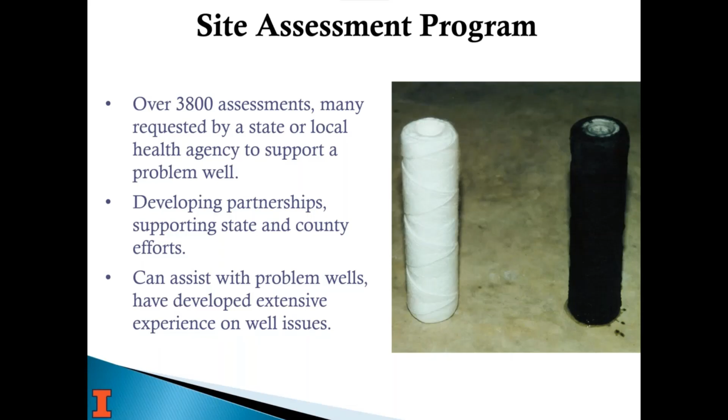So I'm at the State Water Survey. Actually, all three of us are. And just a little bit about us. We're not real well known, just from the standpoint that every state has a state geological survey, and most folks are familiar with that. Illinois also formed a state water survey back in 1895, really because of cholera and typhoid outbreaks and its relationship to water and safe water.

And since then, we've grown into an agency that houses the state's well logs. We have a lab. We do a lot of work. When a well owner calls us in Illinois, we can provide them a lot of information from our files. We have records dating back to the 1800s on wells in Illinois. And we also help communities with water quality problems and do applied research related to drinking water and well water and groundwater issues.

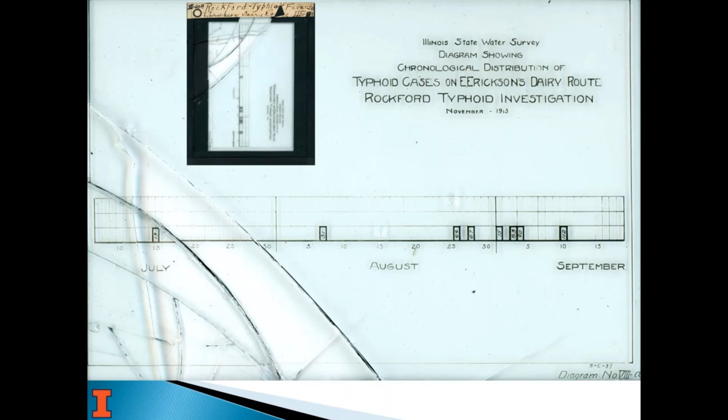Everyone gets their milk from one shop, if you will, and that is usually a large tank where everybody's getting their milk out of a bucket, pouring it into their containers and taking it home. And so this was an investigation to see if the milk company might have been contributing to this. It's just pretty interesting stuff when you have a chance to go back and take a look at it.

So as a private well owner, here are the things that we really want to make sure people are clear about. Private wells aren't regulated. The Safe Drinking Water Act regulates community and public water supplies. Private wells are not. So you're on your own to make sure your water is safe to drink and your system's maintained so that you always have water pressure. Your water's safe to drink, all those things.

And well water many times can be the best tasting, safest water in the world. But sometimes it can include things that are odorless, colorless, and have no taste. And a good example is arsenic. It's naturally occurring in some groundwater, not everywhere for sure. But we have one aquifer here where there's several counties where there's a fair amount of arsenic. You would never know it from drinking it. So you need to test. That's the bottom line, to be sure.

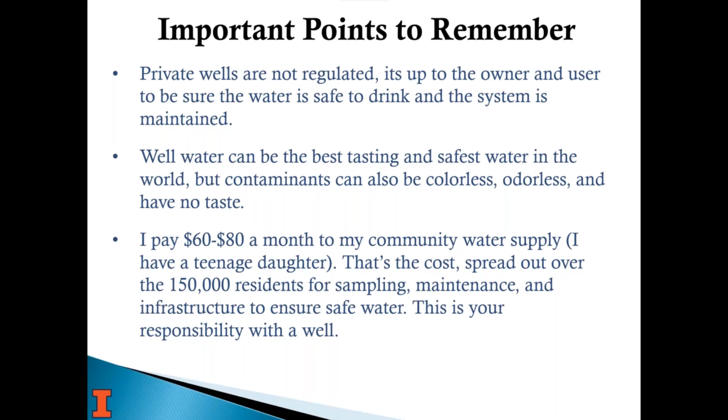You need to maintain your system. You need to make sure you're putting a little money away so that whenever you do have a pump fail, it's a mechanical device, eventually it will, or there's some other issue, you test and discover you have a contaminant and you need to add treatment, that you've got a way to do that. And you just need to be responsible and a good steward, both to protect your family and also the aquifer in some cases.

So what we really hope to get out of our 10 lesson class and these webinars is really what we want everyone to learn, that you need to understand where your water's coming from. So you need to have a well log if it's available and understand what's on it. And we're going to go over that today. How deep it is, whether it's got a screen or not, whether the pump's down in the well or at the surface, all those things.

You can find out from your state or local agencies a lot of times if there are any naturally occurring contaminants. If someone calls us, I can tell them where we know there's arsenic in the aquifers and where there isn't. There's other areas of the state where there's different constituents. We have an area where there's salt water upwelling into the freshwater aquifers from 1,000 feet below land surface. So knowing those things and knowing who to contact, it's important for you to be a little inquisitive, be a good investigator, and find out if there's anything like that that could be a concern.

Some things like iron are pretty ubiquitous in groundwater, and it causes those red stains. It's not a health risk per se, but understanding those things may help you understand what you need to do if you want to avoid red stains on your clothes when it's really high. It'll also help you learn which questions to ask. When you have some knowledge about your well and that light bulb goes off, you'll be much better equipped to talk to a contractor or a plumber or your health department or your geological survey, whoever it may be, about issues related to your well.

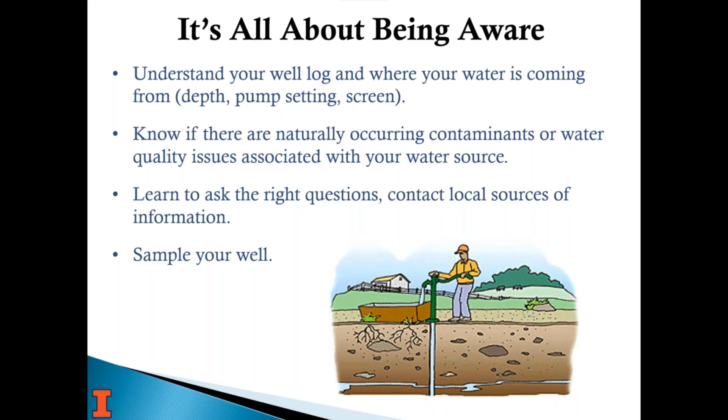And then lastly, sample your well. It's estimated that 2/3 of well owners have never sampled their well water, their drinking water. But it's necessary, and it's something that is simple to do. It does cost a little money, but it's important and it's part of the protection for your family's health.

And so if I have an aquifer that's all sand and gravel, uniform size, and 100 feet thick, if it's full of water, I could take all the sand away and I'd still have 30 feet of water over that entire area. So these systems, especially sand and gravel areas, tend to be highly productive. You see along river bottoms all over the country big sandy areas where they're growing vegetables and melons. Those folks can pump up to 2,000 gallons a minute from some of their wells for irrigation, because the aquifer can sustain that kind of pumpage since there's so much water available.

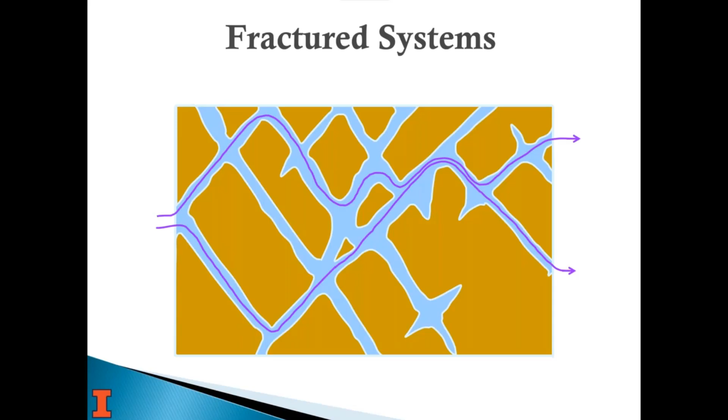It doesn't have very many fractures. I know there's a person that lives on the western slope of the Rockies that contacted us. His well only pumps a half gallon a minute. That's all it'll sustain, and it's just because that's what's available. It just depends on where you're at, what water might be available, and what kind of geology you have under your land.

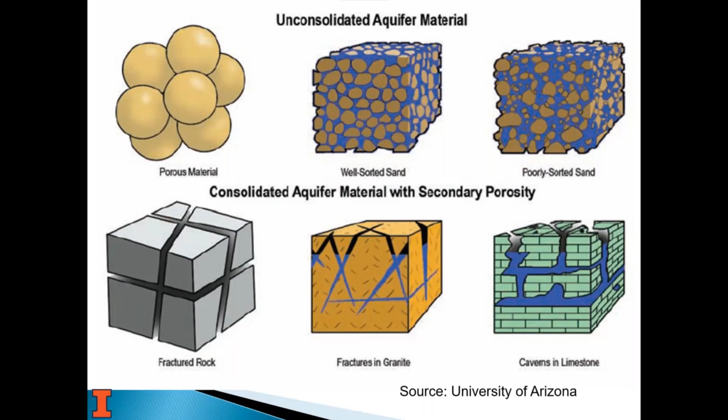We have a lot of karst or caverns in limestone areas in southern Illinois, Indiana, Kentucky, Tennessee. Those are good because those large caves were formed from water running through them, so they store a lot of water, but they also cause sinkholes at the surface. So things from the surface can get directly into the aquifer and contaminate it. It's kind of a double-edged sword in that respect.

Water flows based on pressure. If I pour water on a table and lift one end up, water is going to flow down that table because it's going to lower pressure. Or the opposite way to look at it: if I have a juice box with a straw in it and I squeeze it, I increase the pressure inside, so water comes out the straw. That's very similar to the pressure in an aquifer. When you put a well in, that's the straw. The water level may come up above the top of the aquifer because there's pressure on the system causing that.

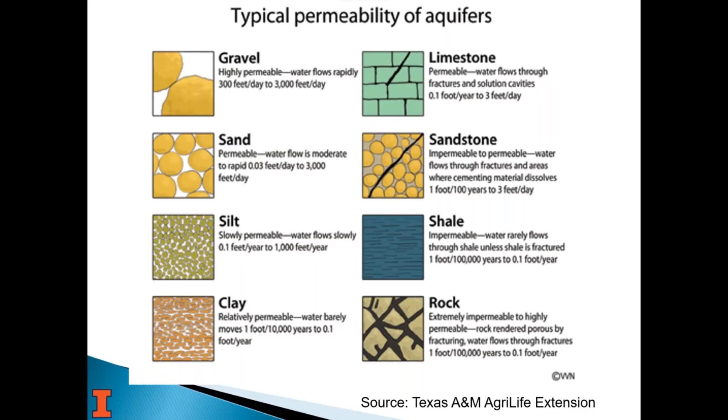And so you may go deeper to find a thicker unit or something in bedrock. We're lucky in a lot of respects that a lot of folks have come before us. So there's records in most cases of where there might be water in a given location. And so you kind of have an idea just from looking at other well logs where you might need to drill and how deep, like if you're buying a new property in the country and building a house, that sort of thing.

But in some cases you might have a shale that you have to get through before you can get to any water, but below that there's a lot of sandstone and it's full of water, and there's a lot of things available. So you need to understand, again, if you have a well log, what unit you're in, and all those things.

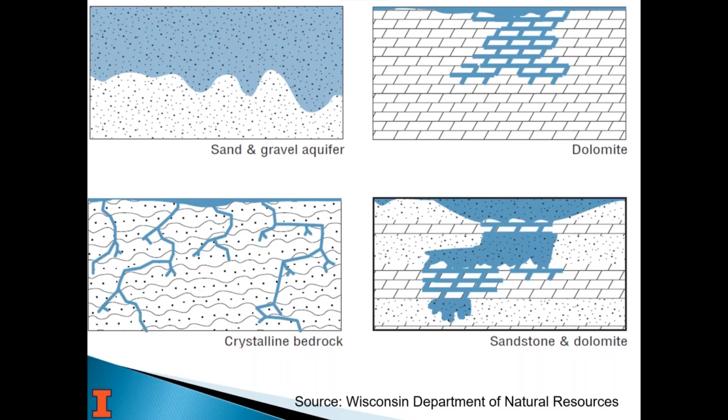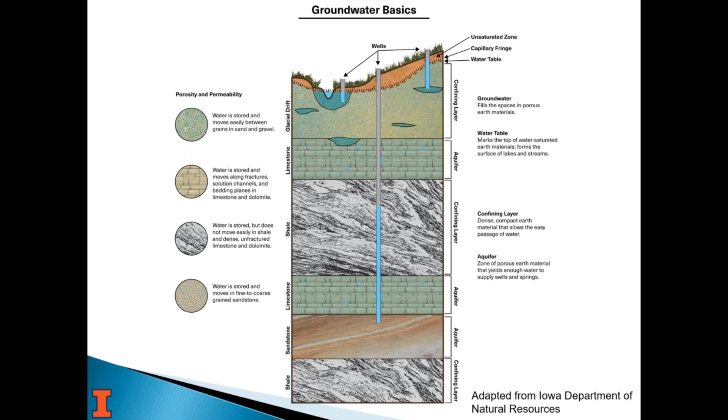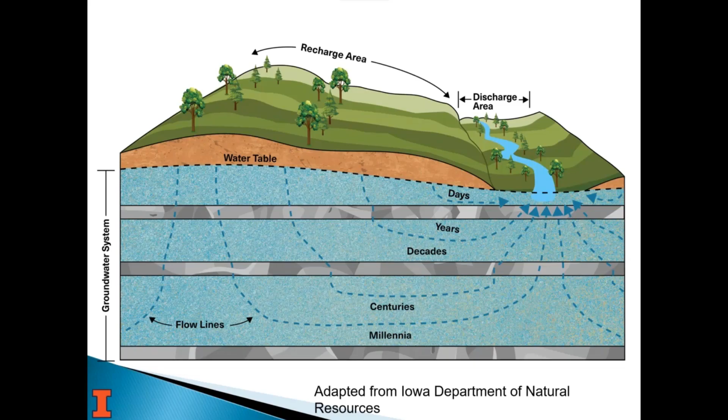But especially when you're talking to kids, a great thing to say is, the water you're drinking today, there's a finite amount of water on the earth. It may have been drunk by a dinosaur. It's always recycling. It's all, again, part of the hydrologic cycle. What doesn't infiltrate in the ground runs off into a stream or river, eventually gets to the ocean, evaporates, and starts all over again.

So as far as aquifers go, really your availability is dependent on the geology. And so when you don't have a really good geology for an aquifer, where there's enough water that if you put a well there, it's going to be able to pump at a steady rate and you'll always have water available, sometimes you put in a dug or bored large diameter well. In the old days, a lot of people who lived in rural areas hand dug their own well. It's uncemented brick lining. It may have been less than 20 feet deep, but it's getting water from the water table, not necessarily from an aquifer.

The water table is where, even if it's not aquifer material, that clay I mentioned before still has a porosity of 30%, it can be saturated. And so water can slowly seep into that well. And that's why you make it a large diameter well, because it creates a bunch of extra storage. So dug or bored wells are typically where there's no real aquifer.

Other than that, you have a drilled or driven well into sand and gravel, and by driven I really mean a sand point. Some states don't allow those. They're actually not a good idea. If you have a sand point, you should reconsider. There's no real way to keep that safe from any kind of surface contamination. They're typically really shallow, but a sand and gravel aquifer, yeah.

And then the third type, as we already mentioned, is consolidated bedrock, which depending on where you live could be sandstone, limestone, dolomite, a lot of choices there. In some cases, like here in Champaign County, we have 2 sand and gravel aquifers at different depths, separated by clay. And then we also have bedrock. And no one drills into the bedrock because the sand and gravel aquifers are shallower, there's more water available, and it's cheaper. It's a lot cheaper to drill a well 100 feet than it is to drill one 300 feet. You can find out those differences just by talking to someone at your state resource agency or your state geological survey.

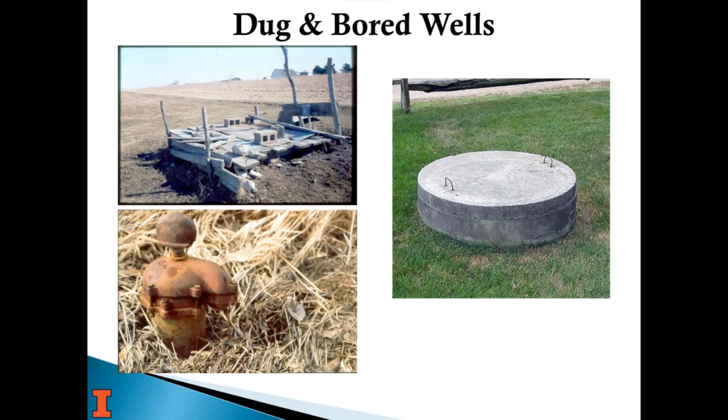And I'll show you what those look like here. So the one on the left here is the one where the pipe comes out, where the concrete tile comes up to the surface. And you can see this shows most of the geology here is soil, and it's brown, so it's not got a lot of sand in it, but there may be a few sand lenses, and that's where the water's coming from.

And so it seeps into that well slowly at each of the seams where the concrete tile comes together. And so there's a pitless unit on this. This is in Illinois. It's based on an Illinois Co-op Extension diagram they have. But that's why the pitless unit on the picture on the left is 3 or 4 feet below land surface. And so that's there to keep from anything freezing.

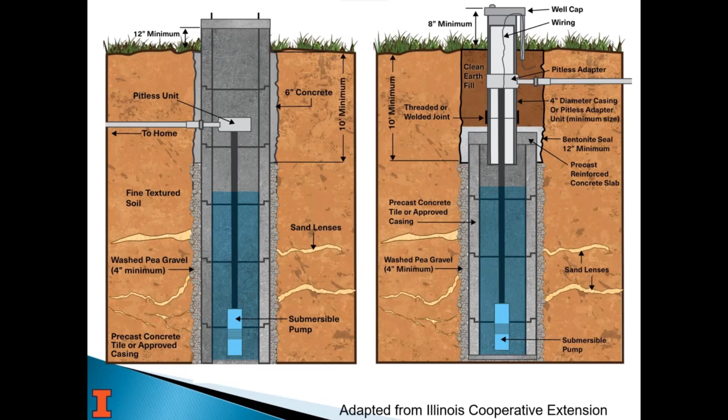The other option I mentioned is the one on the right, where you have just a pipe coming up to the surface that taps into that concrete pad. And that's really so that you can create less risk of anything close to the surface getting in the well. So here they put clean earth fill, or you can put concrete in the hole that you've bored, and that'll keep anything from the surface from getting down in there, if you will. And so those wells, the same amount of water, they're the same diagram. It's just 2 ways of constructing a bored well.

So the next type is a sand and gravel well. I mentioned already how prolific they can be, how much water you can pump from them. They have a screen. So a well screen is very much like the screen on your door. The screen on your door keeps bugs out and lets the air in. A well screen keeps the sand out, but lets the water in. So when a well's being drilled, the distance between those woven pieces of steel is a slot size, and the slot size that a driller will use is based on the material he pulls up. They try to stay away from fine sand because it's easier for it to get through those slots.

And typically you don't put a sand and gravel well right at the top of an aquifer, because the way the sand was deposited, typically the finest material is the last to fall out when water's running. And so the thicker, coarser material is lower in the aquifer. And so you'll drill down quite a ways until you hit more medium sand or gravel before you would put a well screen.

The thing about a well like this is that it's solid casing all the way to the screen. So if this were a 200-foot well, and the last 4 feet were the screen at the bottom, water can only get in this well from 196 to 200 feet below land surface. That's awesome from the standpoint of protecting from surface influences.

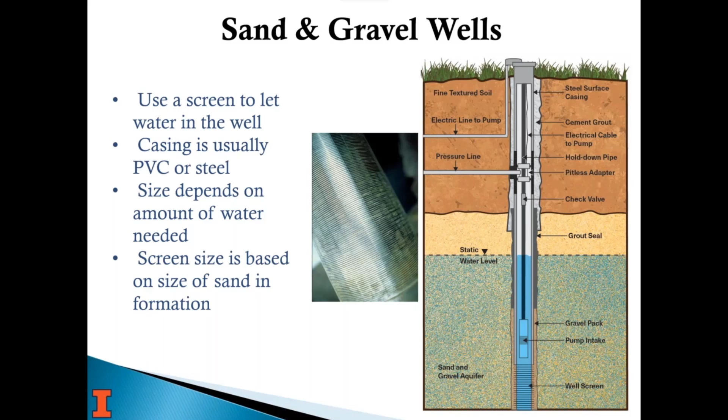As long as it's properly grouted. You drill a hole to put a well in, and the hole's bigger than the size of the casing. That area that's left around, it's called the annulus, and you fill that with clay or cement grout, and that's meant to seal it so that surface stuff can't go down along the casing and contaminate your well or the aquifer that you're getting your water from. And so that's the thing to remember when you have a sand and gravel well: water's only coming in at the screen.

And so here's a typical Illinois well log. That's what I have to show you today. You can see down on the bottom right, it says earth materials passed through: number 24, 2 feet of soil, then some clay, then clay down to 172, and then they hit gray sand. So in the end, they were in 40 feet of sand, from 172 to 212. They pumped it. If you look right above that, it says water from sand 172 to 212. The static water level was only 72 feet.

So the water level came up into the clay, which means that's also artesian because it's under pressure. And it dropped to 140 feet when they pumped it at 60 gallons a minute for 2 hours. So doing that, they know, for instance, that they can pump it at 60 gallons a minute, which is way more than anybody's going to ever use in their home. But by pumping it that hard, they know what the water level is after 2 hours.

If they put a normal size pump, or maybe even a little bigger than normal, a lot of times that might be 5 gallons per minute. In this case, if you look over on the left, the pump capacity is 15 gallons a minute, and they set it at 124 feet. And so they've decided that if you're only pumping at a fourth of the rate, there's no way you're going to get it that deep, and they're right. It won't. It's got too much water available to it.

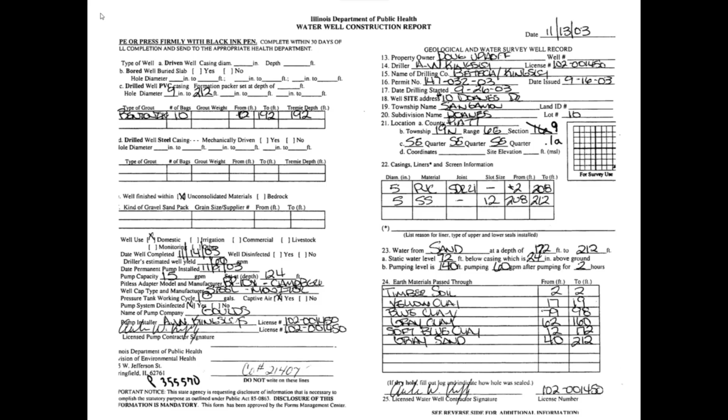And then above number 22, it talks about what they used. They used PVC down to 208, and then they have a 4-foot stainless steel screen that's 12 slot size. And I think that's 12 thousandths is what that stands for. And so all the water's coming in to this well from 208 to 212 feet below land surface, well into the sand and gravel aquifer.

So the other type of common well, probably more common, are bedrock wells. And again, water doesn't flow through rock, it flows through the cracks and fissures in the rock. And because of that, you can't have a solid casing all the way through it to a screen. You have to take advantage of the fact that rock is solid, and if you drill a hole through it, the hole stays open on its own, where it wouldn't in sand and gravel, it'd cave in. And so you only put casing so far into the rock, and then the rest of it, you leave it as an open hole.

And if you look at this example, the larger fracture, the blue, where it's a wider fracture and it has water in it, that's below where there's casing. So that actually gets into the well bore, right? And so in this case, typically a well has casing in bedrock 10 to 20 feet into the rock, and then they seat it there so that the rest of the hole is open, and the pump is below the casing. It's down where it needs to be for pumping, and it's the number of fractures that you hit that kind of dictate how much water might be available.

Because of that, it's possible when you drill a bedrock well that you only hit one fracture. And depending on how deep you are and where that fracture goes, the water you're getting into your well could come from much further away than it likely would in a sand and gravel well. So that's a concern if bedrock's close to the surface, because there may be a place where water is directly getting from the surface into these fractures, some of those sorts of issues. And so it's good to know how much casing you have.

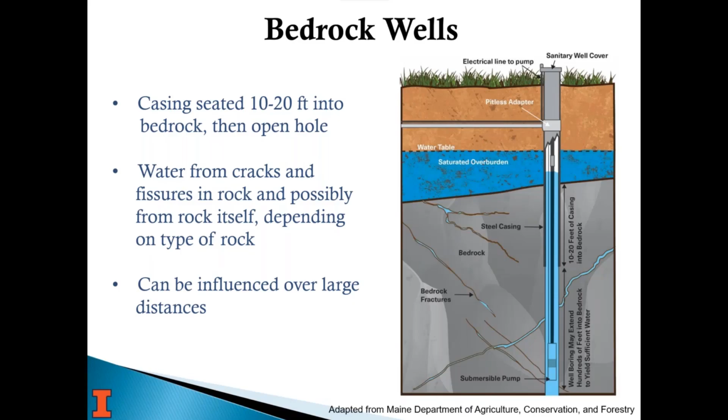I know there was a question like, my well's 500 or 600 feet deep. Why should I be worried? Well, I was at a well in New York State that was 600 feet deep, and it only had 12 feet of casing, which means anywhere from 12 feet to 600 feet, water could get in that well. And that's not protective of the surface, only having that much casing. So if you have a bedrock well, it's really important to know how deep it is to bedrock and how deep the casing goes. I think most states now require that casing at least be 50 feet, even if bedrock's right at land surface. It's just a very different type of construction.

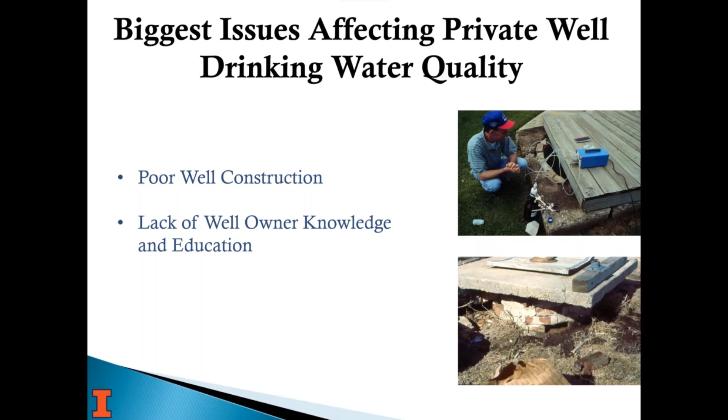When I say lack of well owner knowledge and education, that was my dad. I grew up on a dug well. It was in a ravine where water would flow to it from the surface in a pasture. It was never safe. I didn't know that then. I do know now. My dad always swore that our well water was better than city water because they put chemicals in city water, and that can't be good for you. So chlorine is a good thing. If you have bacteria, it can cause an acute illness, and that'll prevent that from happening.

So one of the things that we talk a lot about is how to improve poor construction. A well is expensive. Depending on where you live, it can be anywhere from $8,000 to $10,000 in the Midwest in a rural area to over $50,000 or $75,000 in California or New Jersey. So it's not a thing to take lightly. But as well construction codes have changed, all the wells that were drilled using the past code are grandfathered in. They don't have to meet it, which makes sense because there's so many.

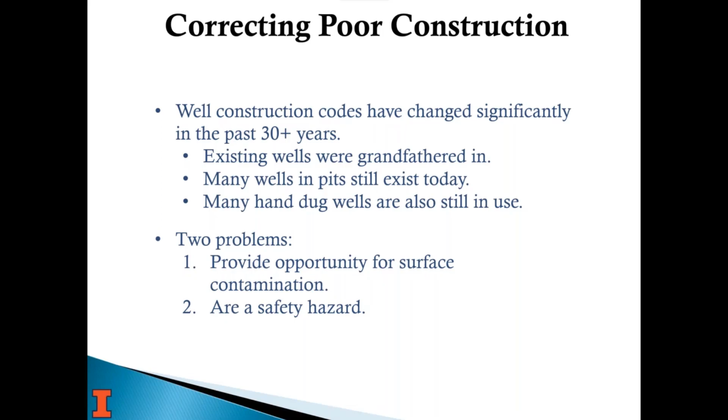But we have a lot of old wells that are not safe, that are in pits or that are hand dug, and they're still in use. And so not only are they an opportunity for surface contamination because they're not protective from surface influences, but they're also a safety hazard. So here's two examples.

The one on the left is from the Washington State Department of Ecology. They're actually the agency in Washington State that regulates well drilling and well construction. And they had a blog, and this is from over 10 years ago now, but on their blog, this picture they put up there, and this is a little well house. You can kind of tell that, but you can see how the rotting insulation is that gray stuff in the back, and there's a funnel for putting oil in the pump, and all that.

And there was a piece of plywood over this, and the person who lived there stepped one time and it broke, and she fell and it killed her. It's just not a safe situation. I'm sure if anyone looked down that well, even when the plywood was there, and put a camera down there, you're going to see a lot of things floating on the surface. And this is what's being pumped into their home for their drinking water.

And this other well, Don Kelderman was down in Southern Illinois researching his family history and came across this old farmstead with an old well, and there was a dead goat in it. You could see the ribs, and it fell in there, and whoever owned that property put a piece of concrete tile and stuck it in so it sticks up about a foot above land surface.

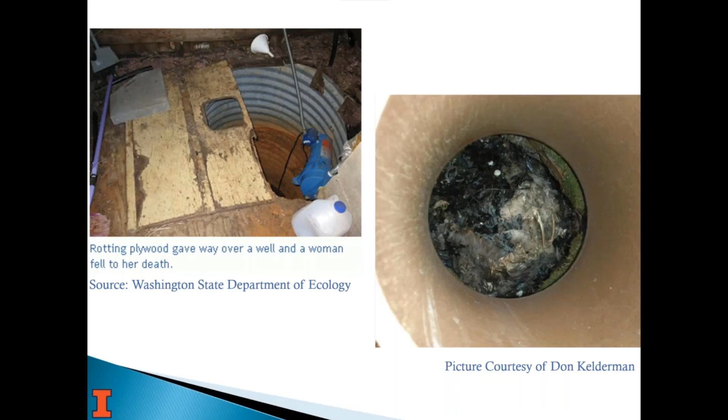And this goat was loose, came by and saw that there's water there and fell in, and that was the end of it. And so you shouldn't have an open hole like that on your property. And you need to make sure there's no way for things, even small critters, to get in your well. So what do you do? You should bring them up to code as much as you can.

If it's in a pit, which I don't show an example of, before the advent of pitless adapters, people put their wells down in a pit because they had to be below the frost line in a cold climate during the winter, or the pipes would freeze. And so a pitless adapter takes care of that need. Now you can have your well casing go all the way up to the surface and have a pitless in your well. And fill that pit up with clay grout.

I mean, we've seen where in a well pit, someone's not paying attention with a tractor and they drive over it, and all of a sudden their tractor tire drops 4 foot down into this pit. It's damaged the top of their well. They can't get their tractor out. It's a safety hazard. Or where people have just walked, well, I'll show you another example. Just walked in their yard and there's an old well there and they didn't know about it.

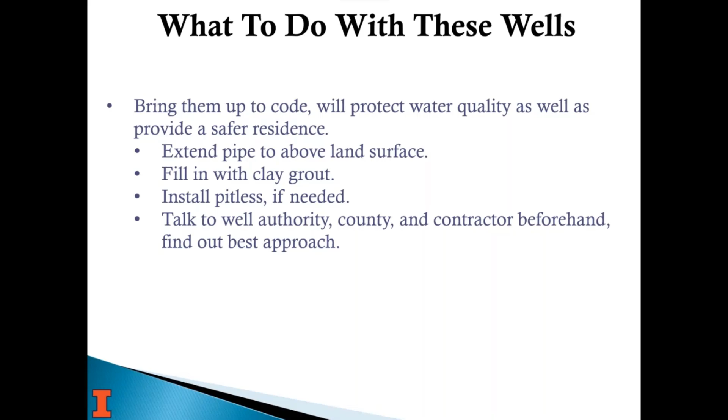So you can talk to your well authority, your county health department or extension, and find out what they recommend in your area for what it would take to bring your well up to code if it's not. Same thing with abandoned wells. If you think about every old farmstead in the country where there's a barn and someone buys that little 1 acre or 1.5 acre area and puts a new house on it, there's likely an old well there that no one knows about anymore. All the folks who did know have moved on or passed away.

And because of all that, we know there are a lot of undocumented wells that aren't on file. In Illinois, we started requiring well logs in 1968, and in some states it was as late as the 1980s. A couple states don't require folks to submit logs at all, or only if they're above a certain size. So there are a lot of abandoned or unused wells out there that need to be properly abandoned and sealed. If you have one of those on your property and you know about it, it's worth getting that properly sealed. And most states in their well code have a regulated way of doing that.

You have to follow their recommendations on what you fill it with, a non-permeable material like clay or cement so that water can't move through it. But if you don't do that, somebody, whether they're supposed to be on your property or not, could fall and get hurt, or worse yet, it kills them. You could be liable. Or if someone's dumping things, we see that a lot too, where people throw things in this nice hole and no one's going to see it again. If you contaminate an aquifer and it contaminates any of your neighbors and they can trace it back to you, you're going to be liable for that too, and it's just not worth it.

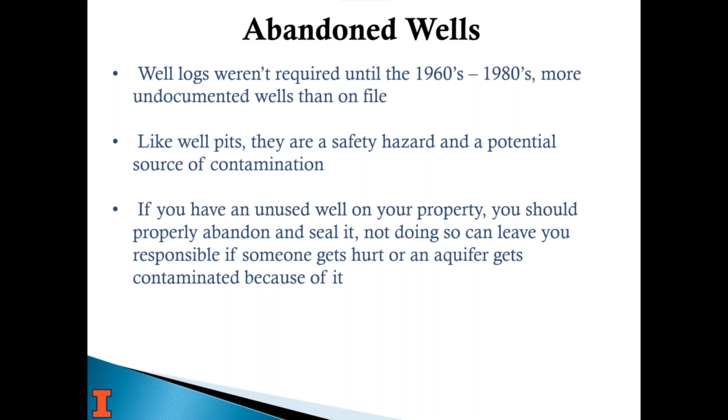These things happen more than people realize. And it's always worth making sure any old wells or unused wells are filled in properly, and there's no chance of any of these things happening.

So a little more geology, the difference between aquifers and aquitards, I kind of alluded to it. Aquifers are where there's enough water that you can put a well in and get enough water for your home supply, where an aquitard is a unit that prevents water from flowing. And so you wouldn't put a well there, and if you had water in your well where it seeped in slowly, you'd quickly pump it dry, and water can't get back into the well very quickly.

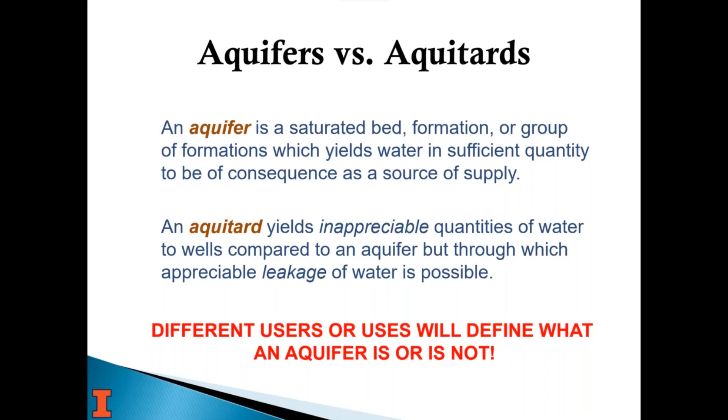And the same thing, an aquitard is just the opposite. It's where there are inappreciable amounts of water available, or leakage into that aquifer or into that material. And so different people define it different ways. I think it's kind of silly. It's really about whether there's a good water supply there or not. And then they can either be confined or unconfined.

So an unconfined aquifer is where it has a free surface, so it's not completely full. The best example of this would be a sandy area near a river. If you're trying to dig even a post hole in one of those areas, 3 foot down there may be water. And so from that point on, no matter how thick that sand is, it's all saturated.

But right where it becomes saturated and you have that free surface, that's at atmospheric pressure. So it's going to go up and down even when the weather changes and atmospheric pressure changes. That can cause water levels in a well that's in an unconfined aquifer to change.

And so a confined aquifer is one which has a cap on it, basically. It's usually like a shale or a till or a clay. And because of that, it's confined. Typically, if you punch a hole in that and put a well in it, the water level will come up in the well above the top of the aquifer. It's up into that clay, or even further. And that's artesian. It means it's under pressure.

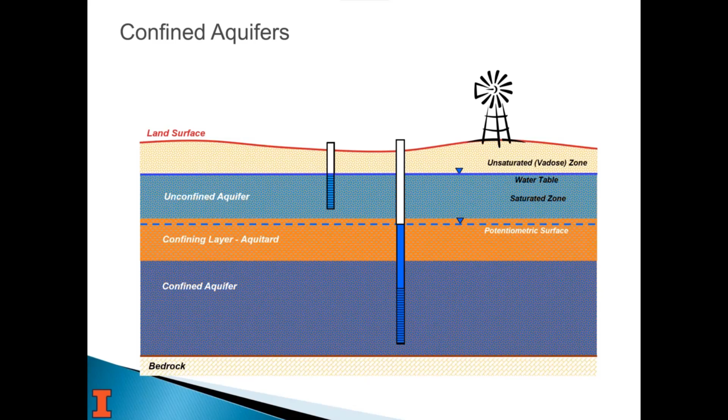The water's coming in this case from somewhere left or right to fill in, like when you pump this deeper well. So here we have a confined aquifer. The little slash marks mean it's a clay or bedrock or some other unit that doesn't allow it to flow.

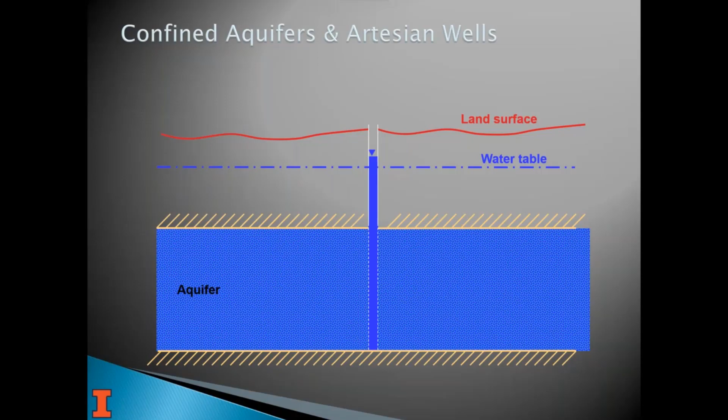So the natural water level here is below the water table, and it's also below land surface. Or it could be higher than the water table, in which case the pressure of the water in the deep aquifer is actually forcing water up through that aquitard into the water table. Again, water wants to be at equal pressure. So as long as there's a difference in water levels, it's going to flow in that direction. Or it can be flowing, which is a flowing artesian well.

Here's another example to show it all at once. In the grand scheme of things, this could be 200 miles wide. At some point off to the right, the bedrock comes up to land surface, but near the stream there's other material that's been deposited by glaciers or running water. So there's a confined aquifer that on the far right is actually unconfined. But as you move down through the system to the left, there's a confining layer, and there's pressure on that system pushing water to the left where it recharges on the right side.

So the best way to look at it is the water levels, the dashed line. The dashed line that's straight for the artesian well shows you the water level in the well based on the water level further right. As you go to the left, you're in a lower landscape and the top of your well is lower than what the natural water level would want to be. And so it flows. If you put more casing on this above that level, then it wouldn't flow. It'd just be up in the well. It'd be a straight line all the way across.

And then the shallower unconfined aquifer that's above the confining layer and connected to the stream, that's the water table. You can see that dashed line where the water level is in that water table well. That'll always be affected by the stream, because usually the stream is a discharge point for these aquifers. That's why the water level is higher in the water table further to the right and it's at the stream on the left side, because it's discharging into the stream. That's, again, part of the hydrologic cycle.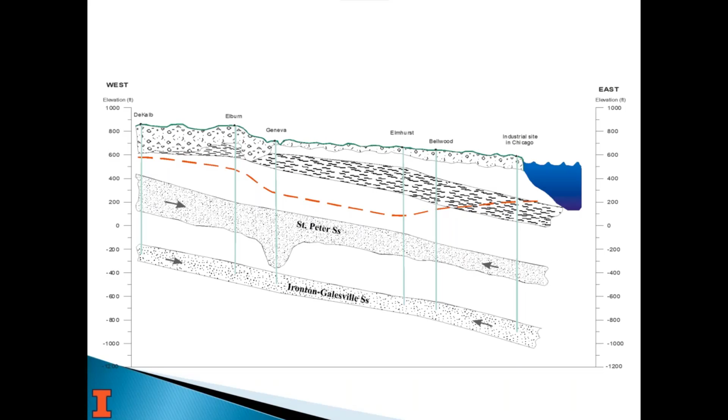And my point here was really that that could even mean that it looks like it's flowing uphill, like the two arrows on the right. It's not actually, it's flowing towards lower pressure, and that's how water moves.

So as a simplified example here, the bottom picture, you're looking from the sky down at a well, and those are elevations. So at the well, it's 410 feet mean sea level. At the very edge, it's 460 mean sea level. So pumping this well has dropped the water level at the well 50 feet. And if you look at the picture on the top, that's if you slice through and we're looking at a cross section straight at it from in the ground. So this is the cone of depression.

And so whenever you have a very uniform aquifer where the flow all through it's the same, uniform size, the same amount of water is available in every direction, it follows this radial flow. This would be a perfect situation that doesn't happen in real life. There's differences in geology and there's boundaries and all these other things, but this is idealized how drawdown occurs in a well.

And so when you start pumping this well, it's going to draw down most at the well, and everything's going to try to fill in from all around it, all 360 degrees. And so this is what water levels would look like in the bottom picture if you had an elevation at these different distances away from the well. So that's a typical cone of depression in a well.

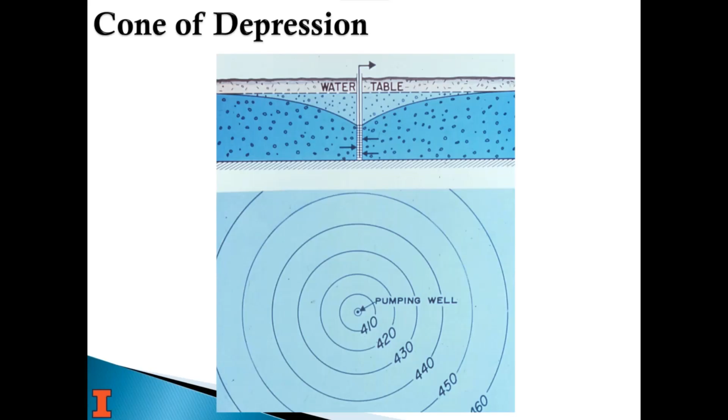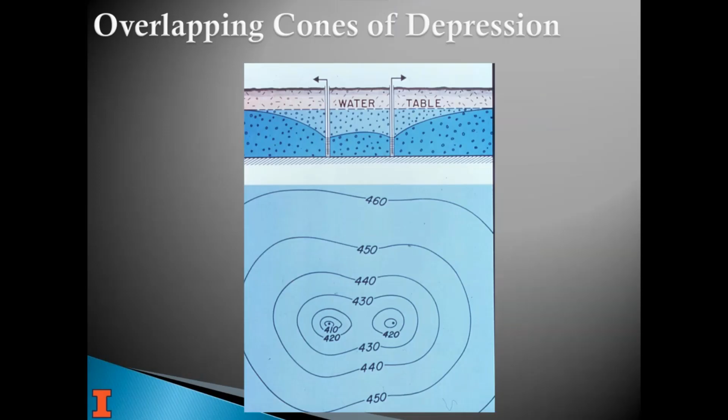If you have more than one well that influence each other, then it affects things because water's coming in from further away on the left and right, but in between them, there's not as much water available because there's two wells pumping and the water's trying to get to both and it can't, right? It's got to go to one or the other, so to speak. And so that makes the water level in between those wells much lower than it would be if only one well was pumping. And so that's kind of well interference, or can be.

And then also, if you're not far enough away from the edge where there may not be any water, in this case, the edge of aquifer that it's showing would be like a bedrock. The middle is a bedrock valley, and then you have the rock edges as it goes up, and then it pinches off the aquifer. That also doesn't allow as much water to come to the well because there's just not the volume there. And so that causes this elongated cone of depression that you see on the bottom, where there's more drawdown on the edge side than the side where there's more water available.

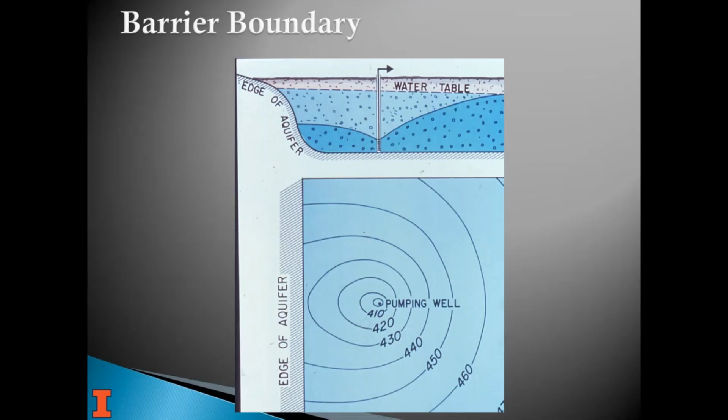And so all of these things affect how much water can be pumped from a given well, or how much water might be available in a given aquifer, depending on the geology, where it's at, and then also the porosity and permeability of the aquifer itself that we talked about earlier.

On the flip side, a river is like a constant source. You're not going to pump enough to dry up a river. I can't think of a case where that might happen. But because of that, the river is always providing water back to the aquifer as you pump it. And so that makes the cone of depression much smaller because the river is a constant source. It's always at an elevation of 445. Based on what a well can pump, most rivers would have a huge number of times that volume of water available.

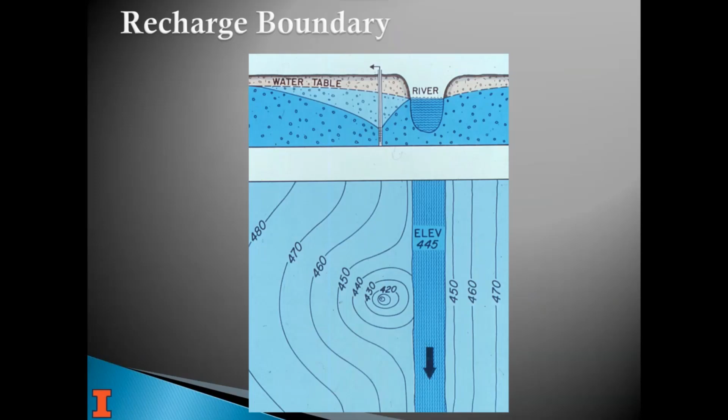And when there's no pumpage, it's what you see on the right of the river on the bottom picture. That's the natural status of the water table. It's 470 on the edge of the screen, and then towards the river it goes to 450 and 445. Water's naturally flowing slowly towards the river and discharging into it whenever there's no wells pumping at all. It's a natural system.

So a number of states, like Illinois, have all their well logs online. We're a sister agency to our state geological survey, and so we work together on this.

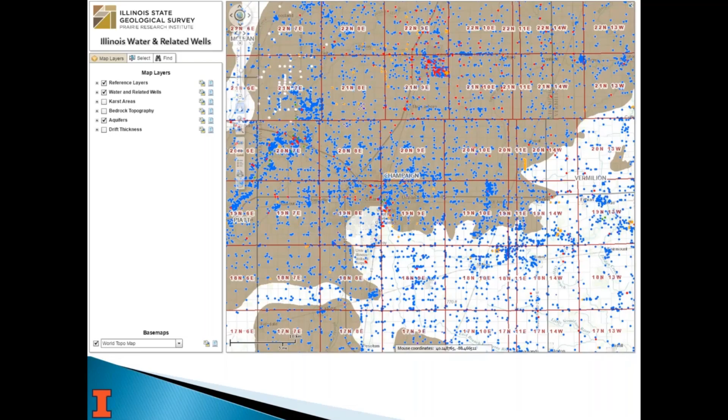We house the well logs. They also have copies of well logs. They've developed this nice system. You can go in and search. All the blue dots are water wells, and I'm doing this near Champaign County, so I can zoom in and then click on a well, and it gives me some information.

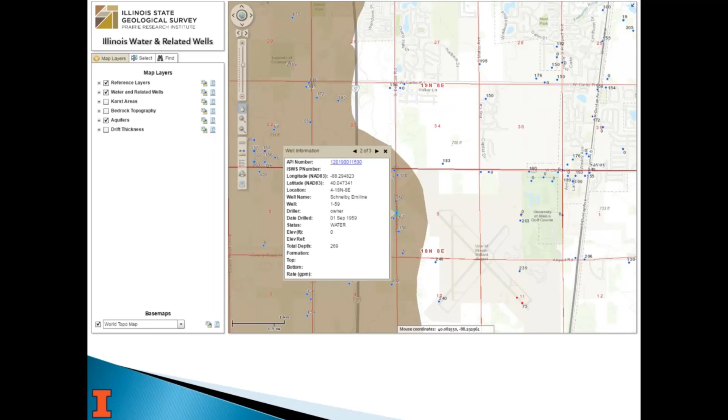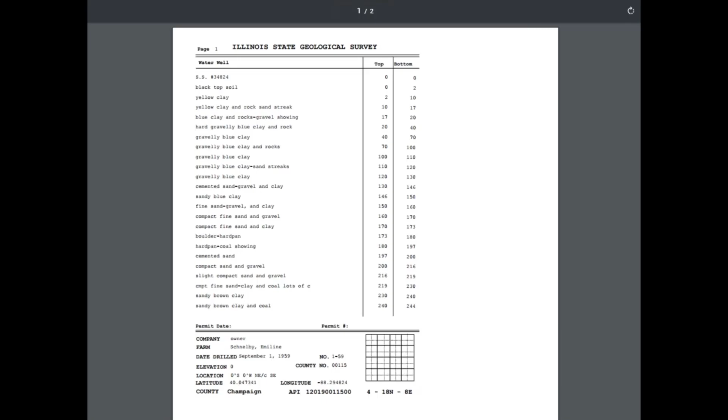The API number is the identification number for the well that the GeoSurvey uses. It tells you a little bit of information, but then if I click on the blue number, I get a generated log. Their database, they actually put all the geology in, and so you can see some of this information. This isn't the log the driller filed. It's not like the other ones I showed you that have the pump information and what they pumped it at and all that stuff.

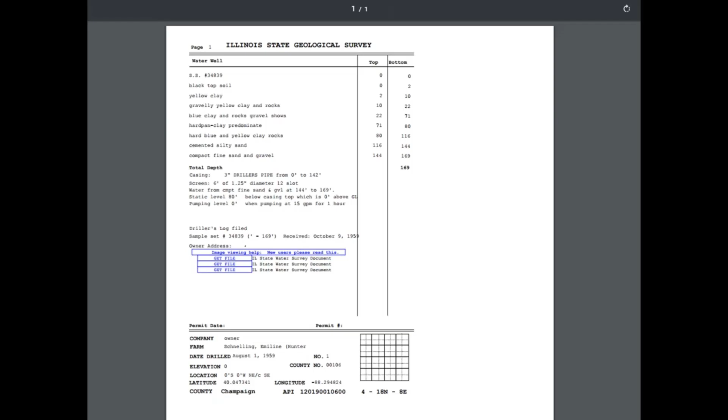But in some cases, we've tried to link all these, and when there's resources to do that, it gets done. And so in this case, we've linked the scanned actual log from the driller to their generated log. And if you click on the Get File button there, it comes up and shows you that actual well log. So it's a nice system.

A number of states have these available now. In California, 10 years ago, you couldn't get a well log from a county unless you were the owner of the property. And now all their records are wide open and anybody can see them. And so, it's really the way it should be.

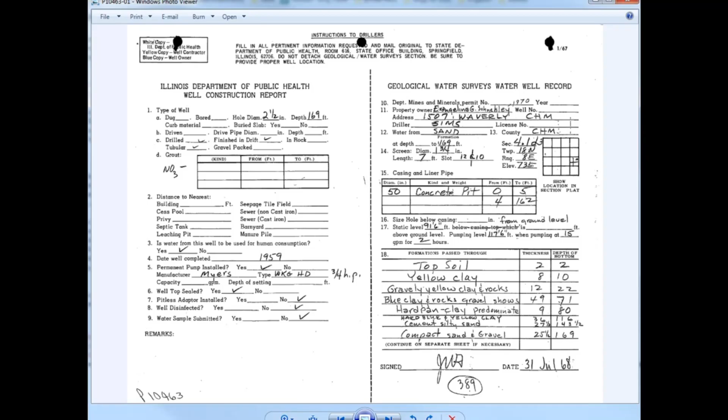This is an older well, 1959, says the date the well was completed. This form wasn't signed until 1968, which means somebody had an issue and the log wasn't in their file, so they filled one out for it. That's about when we started with those things. So that's our groundwater and wells stuff for today.

I want to talk a little bit about our private well class program. Again, I mentioned it's 10 lessons, and the way it works, you sign up and it sends you a PDF as an attachment to an email once a week for 10 weeks. You're on your own to read it, self-paced, but it provides a lot more information about some of these topics and others than I could provide today.

And it's on our website, privatewellclass.org. And we also have an email address and a dedicated phone line if you want to contact us. And people do. We have a lot of folks who call us and ask questions, and we try to help them find someone locally if they're not in Illinois. If they're in Illinois, we've spent our careers helping well owners in Illinois, so that gives us an advantage there.

So this is the front page. You just click on Take Our Free Class. You sign up with your email address, your first name, and what state you live in. That's what the drop down is. Again, we're funded through RCAP and US EPA. One of the things they want us to be able to show is that we are helping well owners in the entire country, not just Illinois or some other area. And so, we keep track of those statistics. We need your email address, obviously, so we can send you the lessons, but that's all it's used for.

There's a Spanish version. If you're a provider and you live in an area where there's a lot of native Spanish speakers, you can go to this website, and you can get to it from our regular site too. The entire lessons are there. Some of the videos are there, and it's all available. Again, this is all free.

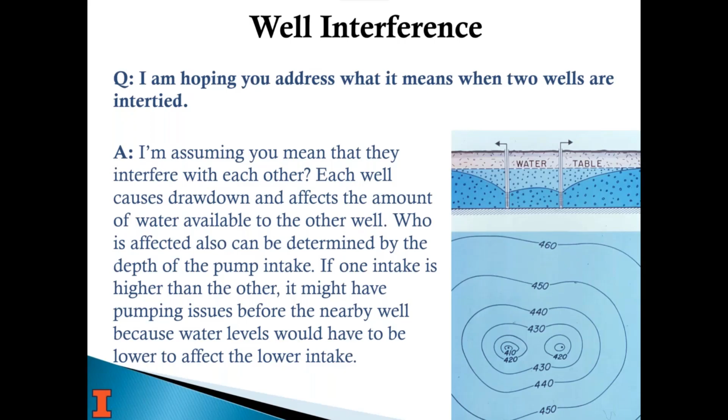So yeah. Why are some well pipes metal and others PVC? Well, they're both common well casing types. And the first thing is, all states but 2 have well construction code that requires you to use certain types of material. Like if it's PVC, it has to be a certain thickness and a certain schedule, whatever it might be. The same for steel. And so other than that, typically it's driller preference, or sometimes it could be landowner preference.

But the one thing is, PVC is not as strong as steel. That's for sure. And in the example we had, which I think I'll show again here, they used both, right? But that's because PVC is strong enough for most well applications. And if you have certain water quality or certain corrosiveness in your water, if it's got too high or too low of a pH, it can cause metal to corrode. Not that it's going to wear a hole in the steel casing, but it's going to leach metals possibly into the water, which isn't good.

The one thing that I can see is PVC in an extremely cold climate, like where there's permafrost, we're talking Canada or Alaska, it could become brittle enough that it wouldn't take much stress on a well casing sticking out of the ground to crack. And so I can see in those cases you might want to use steel. But otherwise, as I mentioned in our example before, they use both.

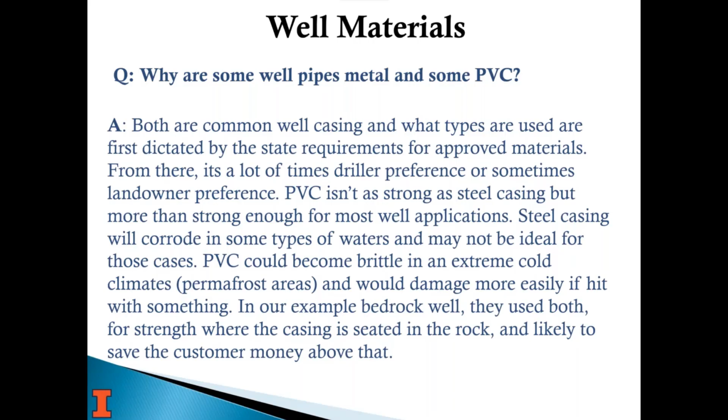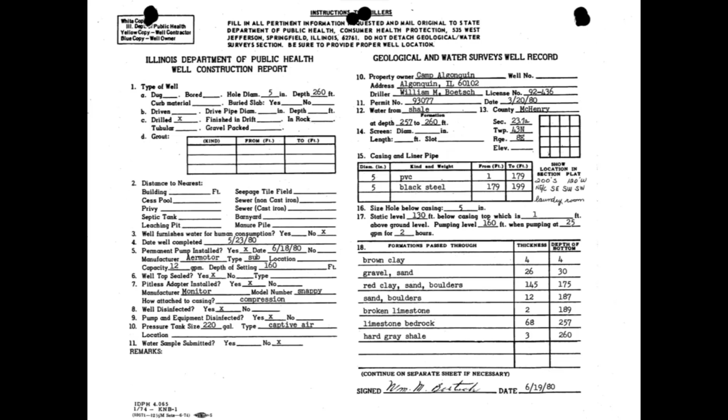And this is that log; number 15 is what I'm talking about. They used 5-inch PVC to 179 and then steel for the last 20 feet, 10 feet into the bedrock. And so they could seat it there.

Is there any benefit to putting a well house to cover and protect a well head and spigot? So this is a well house. It's the well I grew up on. It's got a dug well that is only 14 foot deep. It's kind of in a ravine, so water could run around the well house, actually even under in some cases. And so it would have really been a problem.

The pump is on the surface. So in the winter, I live in central Illinois, we had some pretty harsh winters. We kept a propane tank down there so that when it got really cold and if our electricity failed, we could run a propane tank to keep all our pipes from freezing. And so the whole point here, I guess, is that it really depends on your situation.

If your well is a normal drilled well and say it's PVC, but it's pretty close to your lane or your driveway, if there's a chance of a car or tractor or something hitting it, then it might be a good idea to have some sort of protection, whether it's a house or not. But if it's an older well, like some of the dug wells we've shown today, where it's got a big piece of tin and 2x4s over it, or it's just got a handmade wooden thing that doesn't keep water out, I'd consider putting a well house around it.

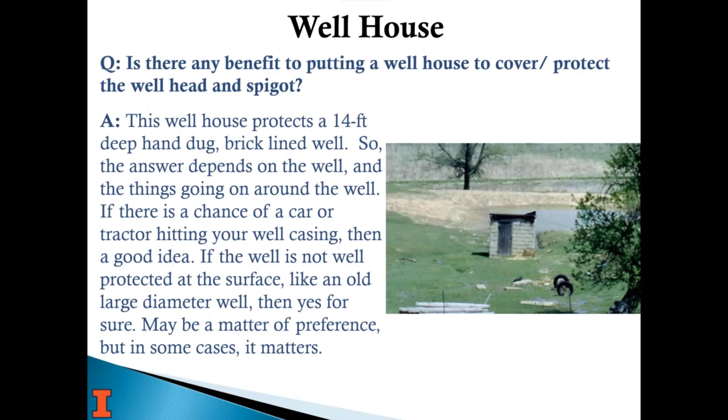Who is the authority having jurisdiction? I've never heard of an AHJ, just to be clear, of well construction in New York State and locality. So this really depends on your state. And I went ahead and answered this. It's really simple: just search New York Water Well Code in Google, and it came up with a lot of great information about the New York Department of Health and how the local health districts then enforce that code and work with drillers and everybody else. It's different in every state.

It's DNR in Wisconsin. In Illinois, it's the Illinois Department of Public Health and our county health departments. Two states, Pennsylvania and Alaska, don't have a well code, and they really don't have a certification program for drillers. So it's different there, and you'd need to look that up for sure. I know in Alaska, they have a work group. They're trying to actually get that stuff passed.

In Pennsylvania, they tried for years to get their state legislature to create a program for regulating drillers and a well construction code, and they can't get it passed, which is sad. But it's not on the folks in the state who care about water quality. It's on their state legislature. So yeah, I showed this because if anyone has any questions, you just Google your state water well code and you're going to find the information you need.

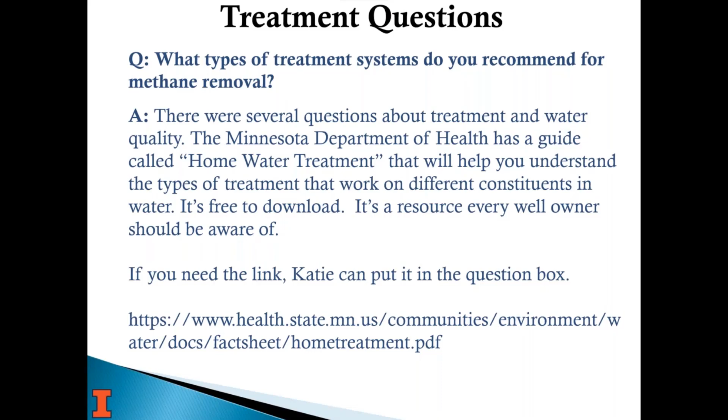It's a free download. I believe every well owner should be aware of it. So I'm going to show that here. If you just Google again, MN home water treatment, this document will show up.

And it talks about what you need to know, why, if you're going to have treatment, you should use one of these 3 certifiers. You should use equipment that's certified by NSF, the Gold Seal from Water Quality Association, or from Underwriters Labs that certify for water quality. And what that means is whoever developed this treatment device has given it to one of these 3 agencies and had them test it to meet a certain standard.

So for lead, that means reducing lead down below 15 parts per billion. Or for arsenic, it's down to whatever level. And so they test it against water that is well above that. And if it meets their standards, then they put their seal on it. Now those companies have to pay for that.

So if you go to a website where there is a whole bunch of treatment equipment options, if you just look for RO units for arsenic removal, you're going to see a list. If you sort it by price, you're going to have some that are in the $100 or $200 range, and some that are over $1,000. Somewhere in the middle, around $500 or $600, is going to be a line where everything that's cheaper is not certified by one of these 3 agencies, and everything above it is.

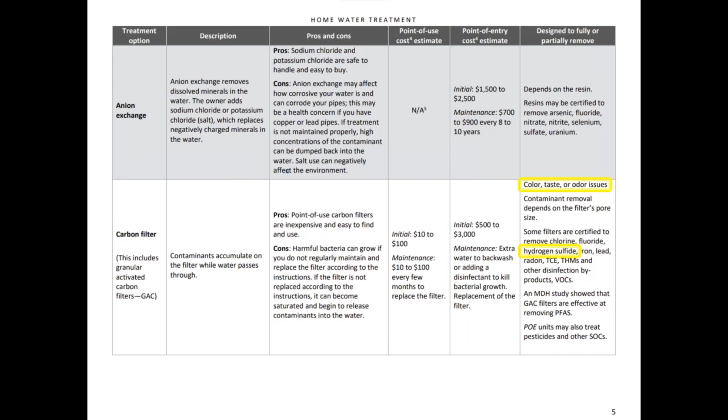All right. Could you please cover pitless adapters and what they look like? So here's 2. One is a pitless unit and one is a pitless adapter. Basically what they do is they take your drop pipe that goes down to your pump and create this elbow down at 3 or 4 feet below land surface.

And that allows you to run water into your home below the frost line, but then still extend your well casing up to the surface. A driller who's going to install one of these will use one or the other and have a preference on what they're used to. But in the end, those things kind of unclip, so you can pull the pitless out and then pull your well out if you need to service your pump or something like that. And then it all clicks back in place. So it allows you to make that 90-degree turn to your house.

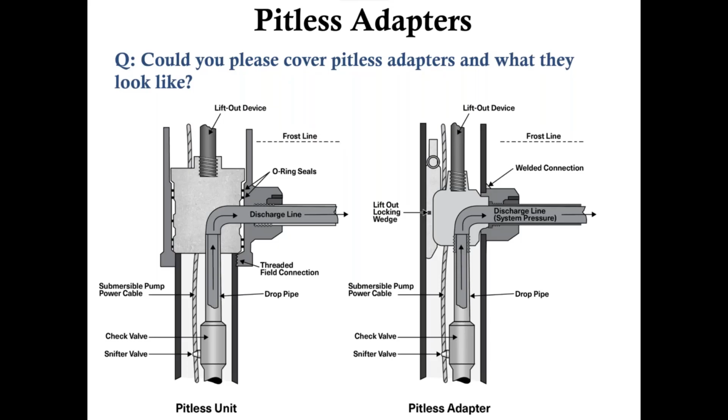Yeah, so before this, your well would stop right where this is, and that's 3 or 4 feet below land surface. And then you just have your pipe coming out of the top of your well, but the whole thing would be down in a pit because you don't want this water line to freeze in the winter. A frozen pipe usually busts and it causes a big mess. So yeah, these are the common ways that's done.

Okay, so water level below the pump. I'm summarizing this because there was a lot more in this question. Basically, they have a 325-foot well that serves 2 homes, and the pump's at 150 feet. Sometimes the water level drops below that, and then they don't have any water. So they're asking if they should have a storage tank for when that might happen, and how would that work with 2 homes? So a lot of questions about how to hook up 2 different tanks or 1 tank for 2 homes and all that.

First thing is, you should lower the pump, right? If the pump's at 150 feet, if you lower it even 50 feet, it sounds like it might solve your issue all the time. I don't know the specifics, but if your well's really 325 feet deep, is there a reason why you couldn't lower the pump? Have a contractor come out and put 50 more feet of pipe on. There's a lot of things it could be. It could be that your pump isn't strong enough if it goes deeper for 2 homes.

But there are tons of issues with trying to use a storage tank, especially in this situation where you don't even know when you're going to use it, which means you'd almost have to have water in there all the time. And that water has to be treated. If it sits for any length of time, it's going to grow bacteria. If it's above ground and the sun's shining on it, it's going to be a problem. You need another pump from your tank to push water into your home and create that pressure. There's a lot of reasons not to do that.

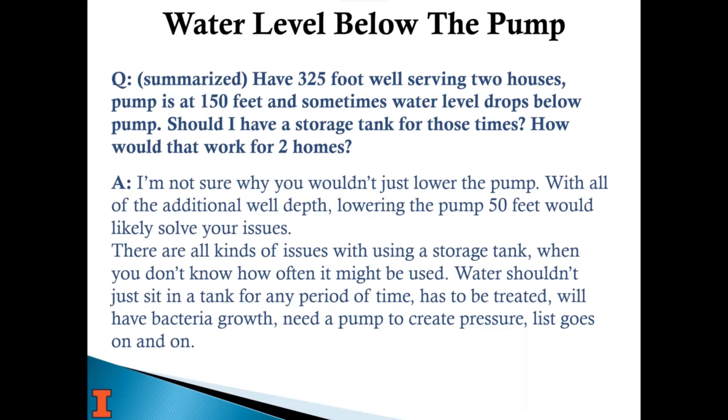So we also got a number of comments: I just want to learn more about private wells. I'm just looking for foundational knowledge. I have no previous experience with private wells. My advice is to take our class. That's the best place to start. If you go back to our webpage, privatewellclass.org, you'll see right in the middle of that page, take our free class. Click on it, sign up. It's a lot of good information. In total, all 10 lessons, I think it's about 80 pages, but that comes in 6 to 10 pages a week increments.

It goes step by step through how water gets in your well, how contamination can get in your well, common problems people have, why you should test, where to find local information. It's a whole series geared towards, in the end, if you do have questions or problems, you'll be able to ask much better questions and have a better understanding of the terms and all of those things. So that's certainly what I would recommend.

All right, so I'm going to go to the questions that you all might have asked. Let me find that.

Is this showing up, Katie? Yes, I can see it.

All right, great. So is a deeper well always a better well? No. It really depends on the situation, especially when you get into bedrock. You can have units that are high in some kind of metal or other constituent that's dangerous. I know Wisconsin has a deep bedrock layer that has arsenic at like 2,000 parts per billion.